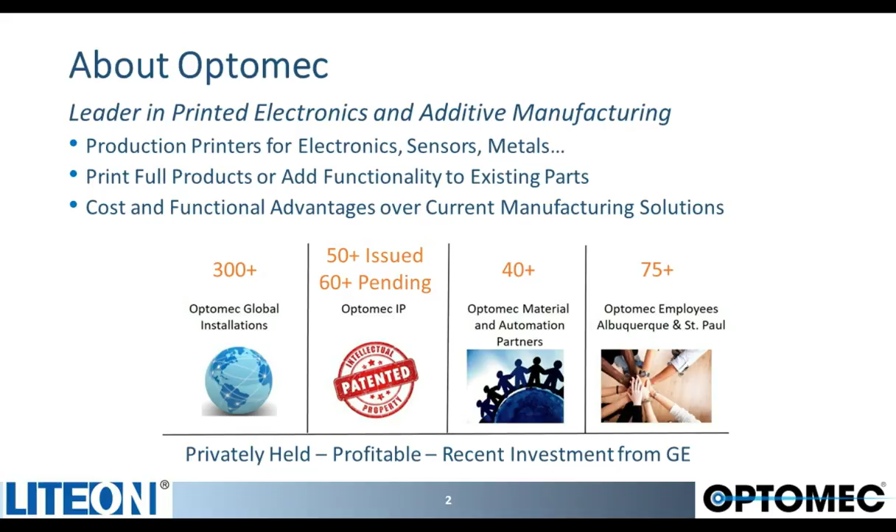So let me tell you a little bit about LITE-ON Mobile. LITE-ON Mobile has over 60,000 employees and a global footprint. LITE-ON technology offers a wide array of products and services within the technology sector. LITE-ON Mobile Mechanical is a strategic business group, and that's who is on the phone with me today, of LITE-ON Technology Corporation, and LITE-ON Mobile Mechanical is a key Optomec Aerosol Jet customer.

LITE-ON Mobile Mechanical employs over 7,000 people worldwide and has multiple manufacturing units in China and India. And LITE-ON also has a network of customer service centers spread around the globe providing design through production assistance. We'll hear more about LITE-ON Mobile Mechanical as we go through the course of this presentation.

So let's talk about Aerosol Jet and our capabilities for handling both 2D and 3D printing. Basically, we use an input of fine particle inks or standard paste. The inks can be conductors. They can be silver, platinum, palladium, copper, nickel. Typically, they're in nanoparticle format. Insulators such as dielectrics can be used, semiconductor materials, adhesives, conductive epoxies, biomaterials. Our first production customers were in the biospace.

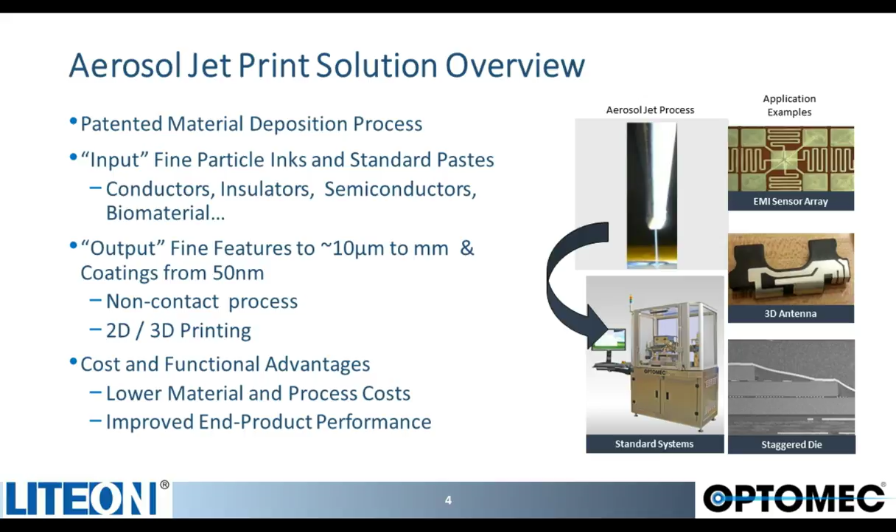And in many cases, we help to improve end-product performance. A lot of that has to do with our ability to print onto complex shapes that current manufacturing technologies just can't do today. So, due to these capabilities, companies such as LITE-ON began investigating aerosol jet as a production solution about 3+ years ago, and that led them to start evaluating our technology to address some of their next-generation production challenges. Some of these challenges were driven by substrate. Some of them were driven by customer functionality that customers wanted to add onto the substrate itself, which prevented them from using traditional manufacturing methodologies.

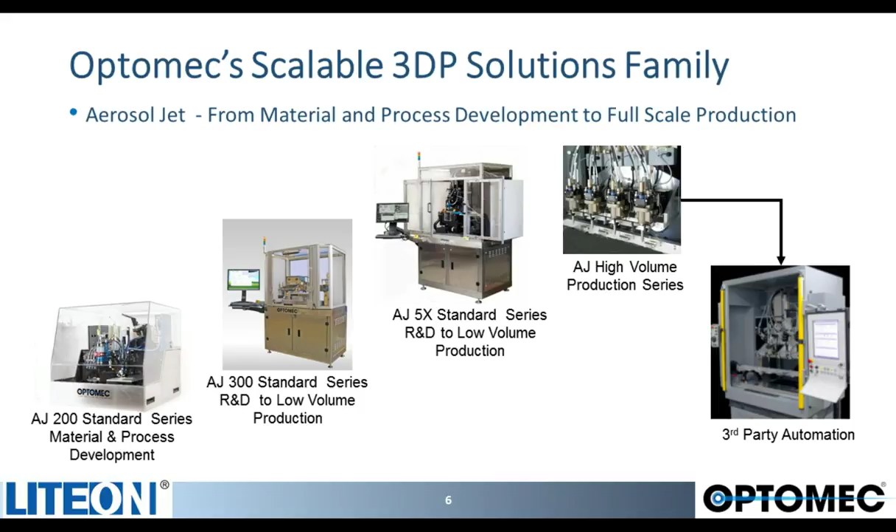So enough about Optomec. Now I'd like to introduce Henrik Johansson. He's a senior manager at LITE-ON Mobile Mechanical, who will discuss LITE-ON's use of aerosol jet production scale solution for manufacturing mobile antennas and sensors. Henrik?

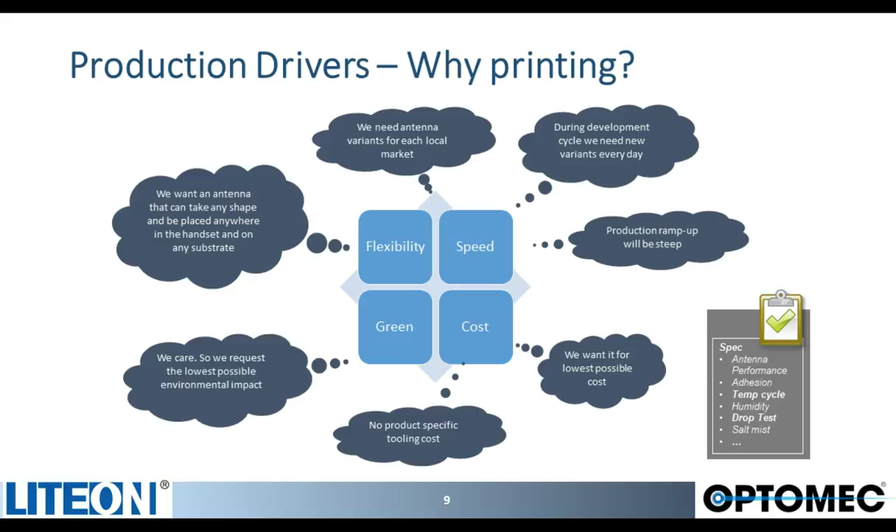So, LITE-ON have been working with printed electronics and printed antennas for at least 5 years in development. And after careful evaluation of several different printing methods, the best suited to meet our demands and drivers, we have selected the Aerosol Jet printing system from Optomec with a motion system platform from a company, Neotech. The aerosol jet printing technology uses an aerodynamic focusing technology to collimate the dense mist of silver droplets into a tightly controlled beam, giving an excellent line definition.

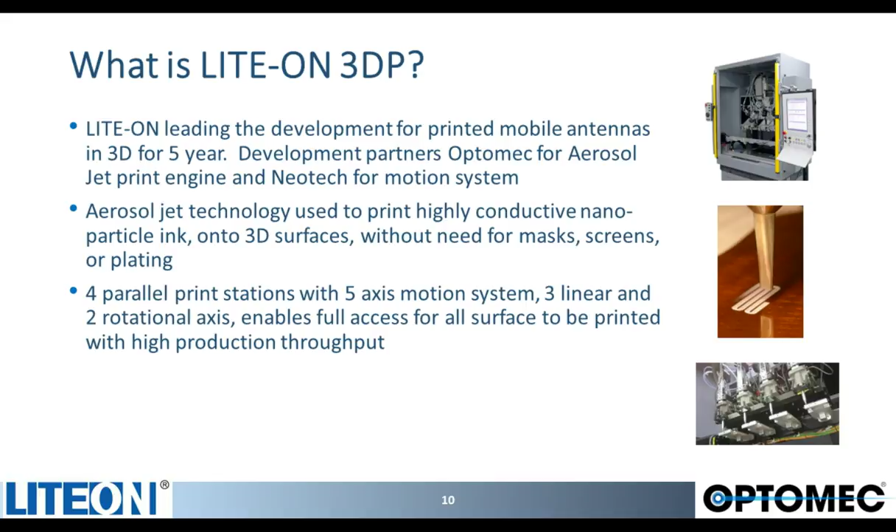And what is really unique with this technology is its flexibility for variable distance between the print nozzle and the substrate. And this is the key and the enabler for printing on complex 3D surfaces. The manipulation of the part and shaping of the print pattern is done with a motion platform with 4 parallel stations with 5 axes of movement, 3 linear axes as well as 2 rotational axes. This gives the ability to print on all sides of the part in true 3D. And the 4 parallel stations then ensure that we have a high output of the system.

Looking back through the development of this technology, we had to overcome a number of challenges, and here I would like to point out some of them. There are a number of ink providers, and we had to develop the one which is best for our application and to secure that ink for high volume availability. For different substrate material, we need to work with the process parameters. There are a number of inks that work well for higher sintering temperature, but for some substrates, such as polycarbonate and PC/ABS, we can only sinter to about 120 degrees C. And at that temperature, many of the inks fail.

We need to ensure the best print quality for line definition, consistent thickness, and the right process speed. And for antenna functionality, we need good conductivity for the sintered trace. The challenge again has been the low temperature resins.

The environmental tests are quite harsh for a smartphone application, each customer having a different set of standards. As an example, for some customers the printed antenna needs to survive high humidity and temp cycling between 25 to 55 degrees centigrade in 9 cycles for a total of 6 days, as well as salt solution sprayed directly to the product for 2 hours, and then left in high humidity for 7 days. And after this test, we check for functionality and adhesion.

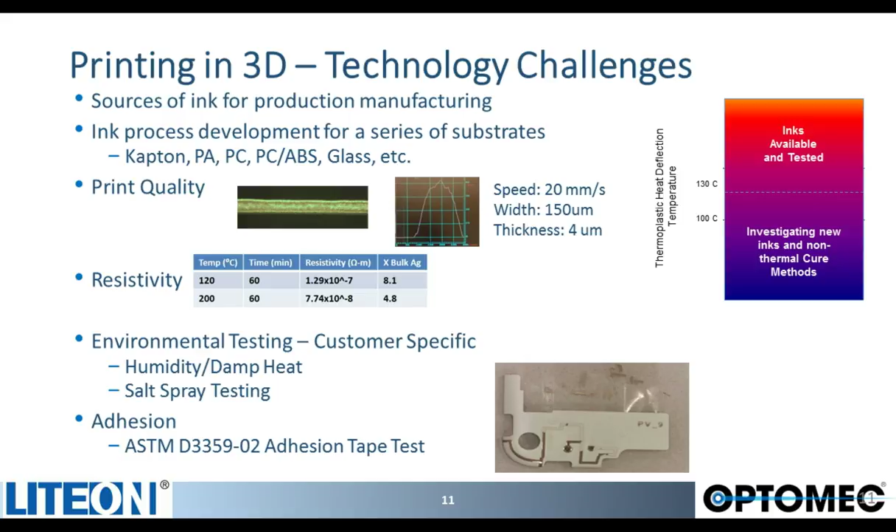And of course, it's very important that we have excellent adhesion between the printed trace and the substrate. This is normally tested with a cross-cut adhesion tape test.

So, moving on. Components for smartphone and wearable devices are typically very complex in shape. To get the best antenna performance, the antenna should be placed far out into the corners. And to interconnect the antenna, normally a wraparound design is used. So going over large as well as sharp radii means that print motion speed needs to be optimized in each section to ensure a uniform trace layer with a desired thickness.

Sometimes for a molded structure, the surface is not as smooth as you would think. The surface can have pit holes and other surface defects that cause challenges during printing. In these holes and voids, we have seen capillary action happen, and the ink is pulled down into the openings, leaving a very thin conductive layer on the top surface.

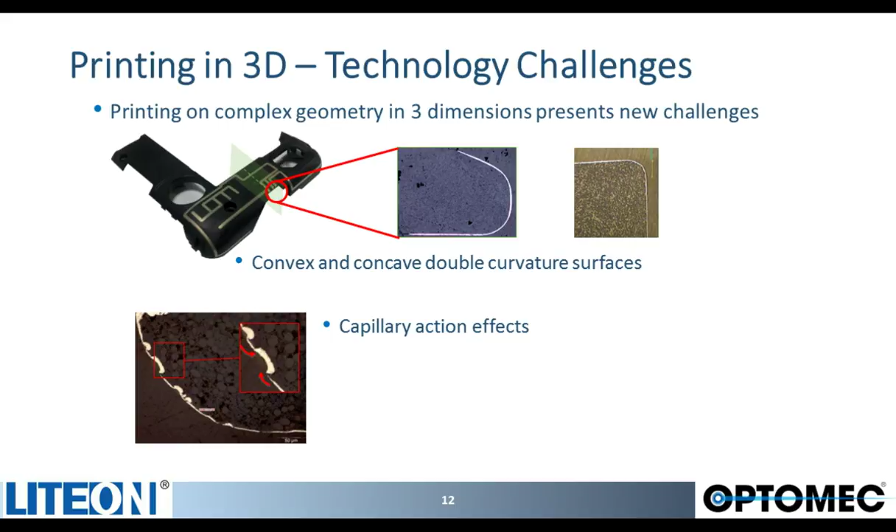The quality of the molding and the print process, as well as the ink behavior, is a very important factor. And with our long experience of in-house molding as well as tooling, we are in the right position of getting the best quality substrate for the printing. And this is really needed for this kind of product.

Further on the molded structure, there are always parting lines from tooling, and when traces are to be printed over these, it creates challenges. This is especially difficult for an electrical via design. The cone shape of the via creates a very sharp edge midway through the part. Tooling mismatch can make the step even bigger, and in mass production over time, the parting line in the tooling can grow, creating a barrier for the ink.

The substrate will have different surface energy depending on the plastic type and also from the molding condition and handling. To get the needed printing result, we have to be absolutely sure we have the right wetting of the ink. Effort was spent to optimize the process and the ink to be sure that we get uniform wetting in all areas of the part.

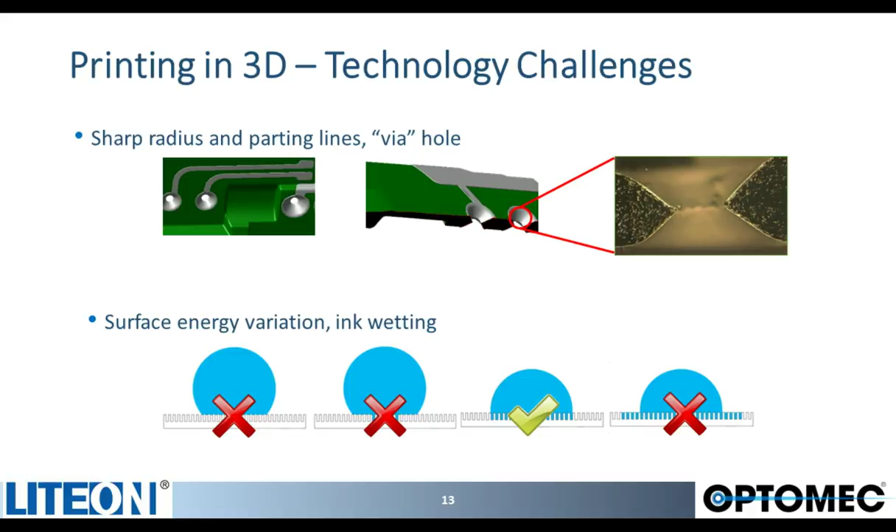So those were some of the challenges we have been working on and solved. Now let's look at the solutions and the benefits of our technology. We now have a wide variety of inks that suit most of our applications. We can print on a wide range of substrates: common plastic, glass surfaces, ferrites, and even metals. We can print on a fully three-dimensional surface over concave and convex surfaces.

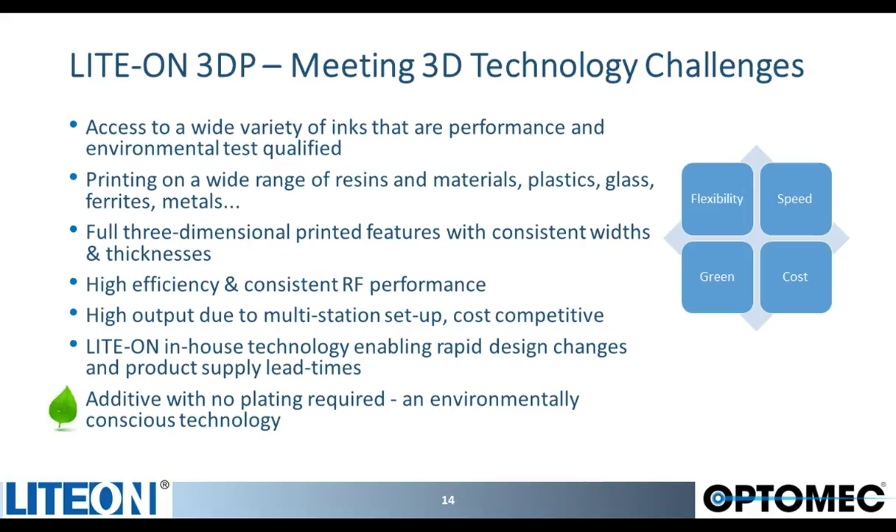We have a high output due to our multi-station setup, also ensuring the best cost competitiveness. Each of our systems today has four print heads. It is a fully in-house technology that can make the finished products in one production cell, also with rapid design changes if needed. It's an additive process and it eliminates the need for plating, making it a very environmentally conscious technology. And now I would like to go a bit more into detail on some of these areas.

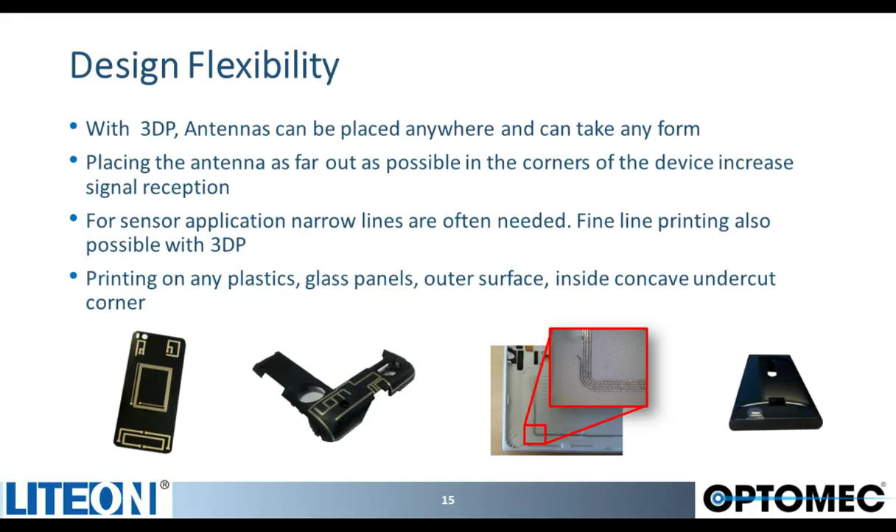Design flexibility also gives the customer free hands for plastic resin selection. No additive is needed in the substrate or in the resin, so we can print on flat or curved glass panels, on outer surfaces, and even inside concave undercut areas in the unibody structure.

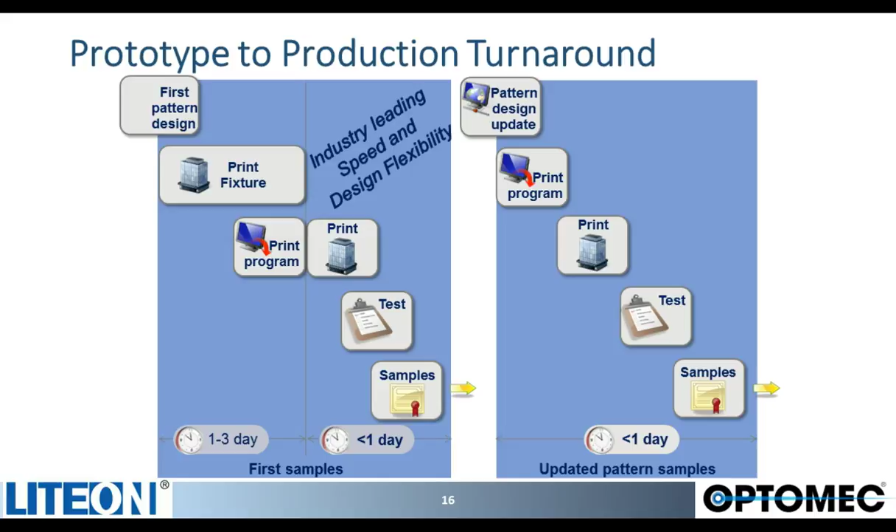So, speed. Speed is very important, and speed in the development cycle can sometimes on its own be a decision factor for what type of production technology to use. With LITE-ON 3DP, we can make samples from scratch in a matter of 1 or 2 days, and changes in the antenna pattern can be done in a matter of hours. Other manufacturing technologies take longer, and some even include a tooling modification. Even a rapid manufacturing method such as LDS will have a longer lead time due to the need for a chemical plating process, normally located at a different facility.

Now cost efficiency. Telecom and mobile business is a very competitive business. Being an additive process, printed antenna cost is driven by trace size. When the smartphones are getting larger, but the antenna size is pretty much the same as before, the competitiveness of 3DP increases. When comparing to LDS, the cost increases when the product size grows larger due to the plating process cost.

For applications like small standalone antennas, LDS can sometimes be more competitive, but as 3DP technology matures, we believe this gap will shrink and soon be removed completely. Further, today most antenna traces are integrated into larger parts already.

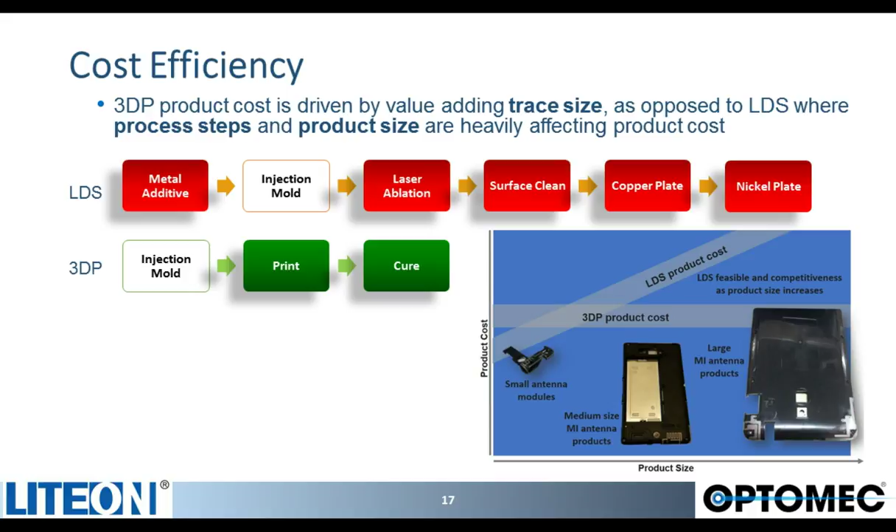So, LITE-ON and our customers put high value on environmental sustainability. 3DP technology is generally much greener than other 3D manufacturing processes such as LDS, especially due to the fact that it's printing and not plating based. Nickel, which is used in an LDS process, is an issue both in production and for the consumer due to the increased risk of allergy. And our 3DP process does not contain any nickel.

Printing is an additive process, which means minimal process waste. We can print on biodegradable and recyclable resins as well. It minimizes the logistics and transportation impact because all the processes can be done in one production cell with minimized product movements. In 2016, 3DP technology won the LITE-ON Group Award for reduction of waste and lowering the environmental impact.

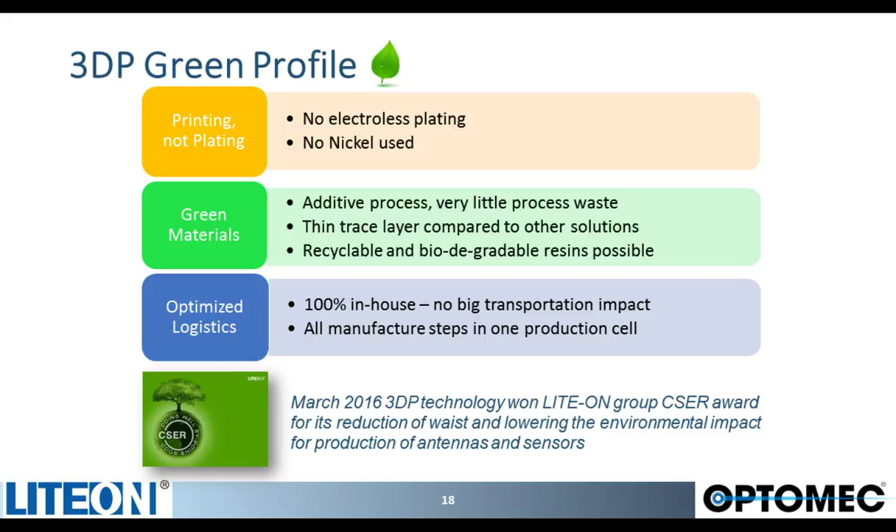So the speaker module in itself is a generic part that can be kept in the warehouse, but the antenna trace can be local variants for different markets, such as Latin America and Europe. And when the specific order comes for a batch of Latin America antenna variants, we can start the production with a very short lead time. There is a speaker piece inside the device, and since that is already assembled, LDS cannot be used because the speaker will not survive a plating operation.

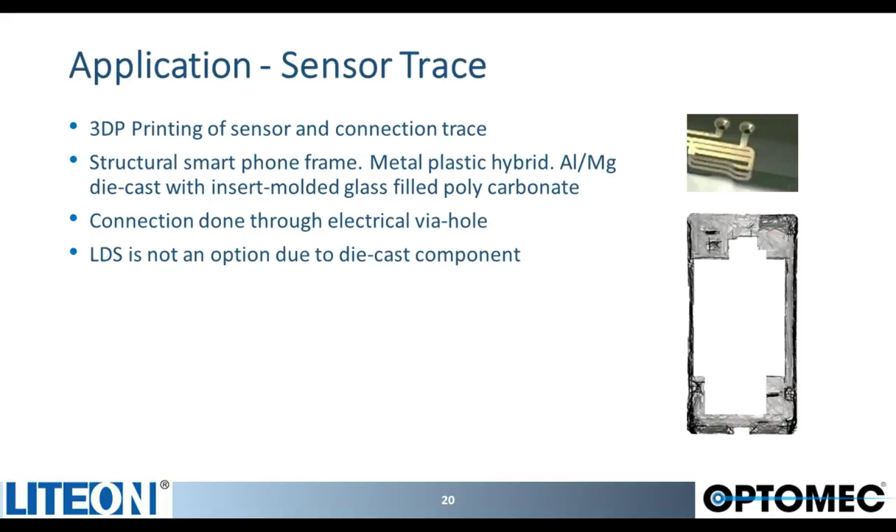Next example is printing of a sensor trace. The 3DP process is used to print the capacitive sensor as well as the connection traces. The part we are printing on is a structural frame. The frame is a metal die cast of magnesium that is combined with an insert molded glass-filled polycarbonate. The metal gives the extra strength needed for a large and thin device. The connection is done through a via hole in the plastic where we are printing from two sides. Printing here is the only option since LDS plating cannot be done due to this metal die cast.

Antennas are placed on the inside of the undercut area, and it's very difficult to reach. So the variable, several millimeter standoff of this process is essential to make this part. This would be very difficult with any other printing technology than aerosol jet. The cover material is polycarbonate that is colored in bright colors in several different variants. It's a native color, meaning that there is no painting process over the plastic afterwards. So again, compared with LDS, this would be a no-go since the additive in the resin and the chemical plating process would actually damage the appearance of this visual part.

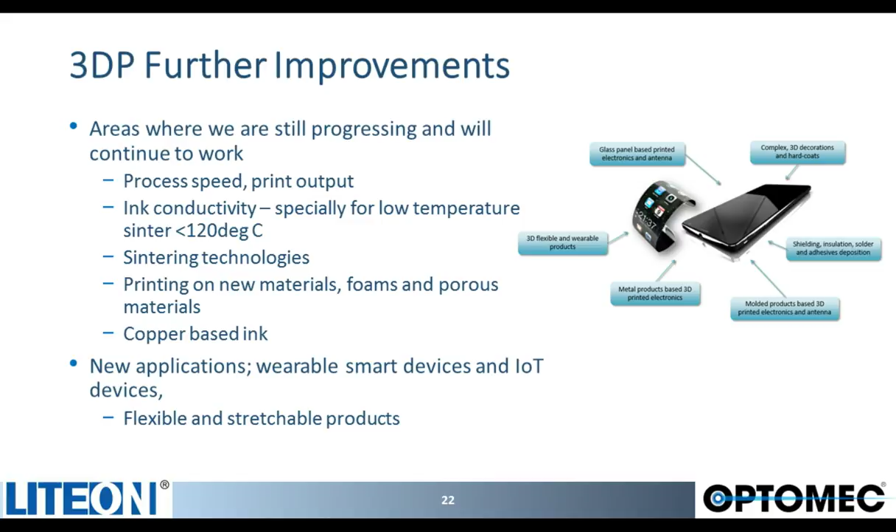So, to sum up here, LITE-ON has been one of the leaders in the development of printed antennas in smartphone applications, and now we have products running in mass production. Aerosol jet is a cost-efficient option for mass production of 3D printed electronics. LITE-ON Mobile Mechanical is a viable contract manufacturing source for mass production in this field.

LITE-ON has been leading the development of 3D printed antennas and sensors for over 5 years. We have successfully deployed and are currently using 3DP in mass production. Our 3DP enables unique solutions and gives great benefits for our customers. So we have increased design flexibility, antennas and traces basically anywhere. We have been able to maximize the development speed, which means shorter time to market.

We have been minimizing the product total cost, so we have attractive pricing for this technology, as well as reducing the environmental impact. So we, together with our customers, see printing of functional traces, antennas, and sensors as a future strategic direction for production of smart devices and phones.